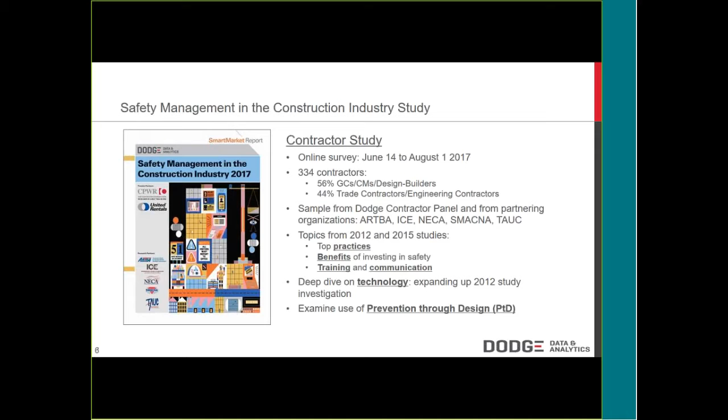In addition to that, we also looked at the concept of prevention through design, and when we get to that point in the presentation, I'll go through exactly what that means. But to understand prevention through design better, in addition to the contractor study that's been at the heart of all three SmartMarket Reports, we did an additional study for this one in particular, where we talked to architects just about prevention through design. This was done as an online survey using our own internal Dodge architectural panel, similar to our contractor panel that we use for the contractor study.

Because it was just the panel, we had a very short fielding period, just one week in June. We had 108 architects who responded. And I do want to emphasize again that what I'm going to touch on, while it's going to be a lot of material, is just the top level findings. So there's going to be a lot more data in the report itself, especially if you're looking for details on breakdowns on things like GC versus trade contractor responses, or responses by size of company.

So I do want to make sure everyone's aware that there are two places you can download this for free: analyticstore.construction.com that I mentioned before, and in addition to that, you can go to our main construction.com site, go to toolkits and hit reports, and you'll see it right there.

So what did we find when we talked to these contractors, and when we get to prevention through design, the architects? Well, the first area we focused on was practices. We wanted to find out what people were doing. In the past, we had looked at practices as well, and done a pretty large, comprehensive look at a bunch of different practices. This time, to save time to get to some of the other issues we wanted to cover in the study, we focused just on some of the top practices that had come up in the previous research, the things we saw people frequently doing.

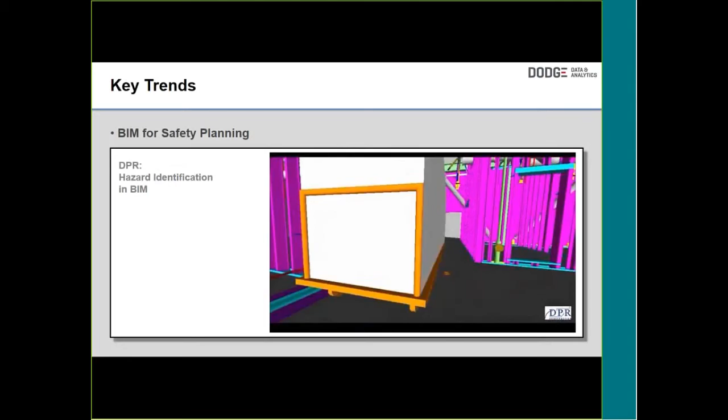On that last point, we've heard anecdotally from contractors that it's becoming more of a challenge to find skilled laborers on site who are adept at reading plans. The ability to have 3D images is becoming far more important on site for people understanding what's going on. I have an example from DPR Construction about how they used BIM to improve safety. It's a small example, but a compelling one.

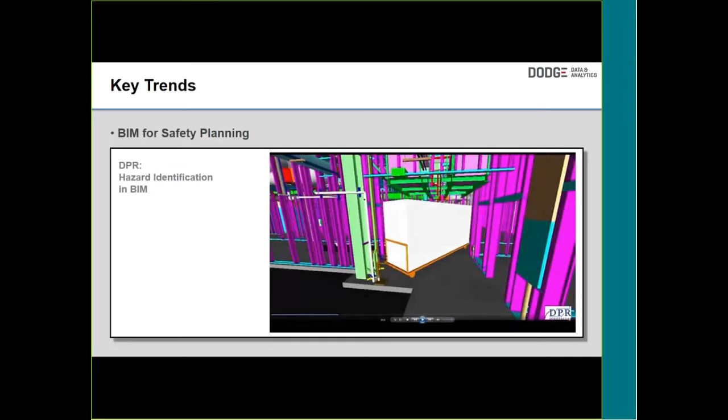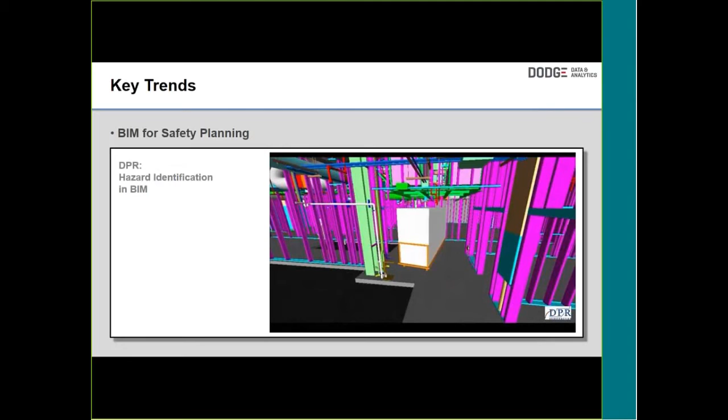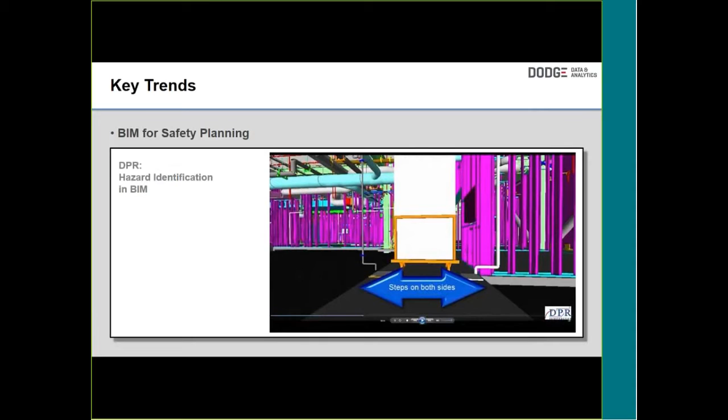They had to bring a big cart full of drywall sheets through a very tight corridor on their project. Instead of just getting it in there awkwardly trying to manage around every obstacle, they were able to map out every obstacle that might impact its course through in advance, and help set up the guys who have to take it through so they could do it much safer.

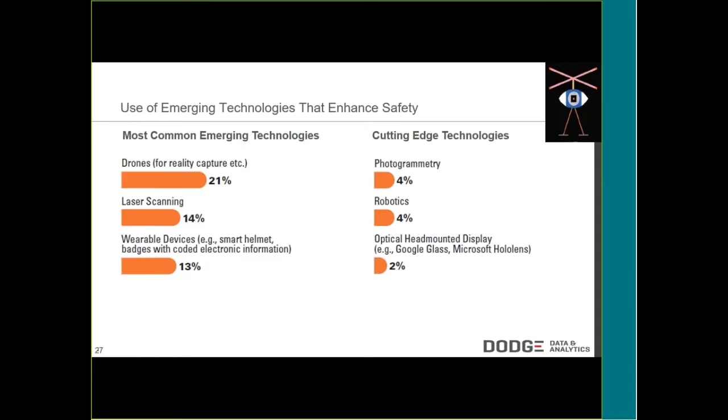When it comes to emerging technologies, we can see some activity. 21% are using drones on site right now, again not necessarily for safety, just in general. 14% are using laser scanning, and 13% are using wearable devices. There are slightly more cutting-edge technologies where we see a much lower level of use right now, but it's great to have this baseline for the future. This includes photogrammetry, robotics, and optical head-mounted displays. We'll be interested to see if those numbers go up over the years.

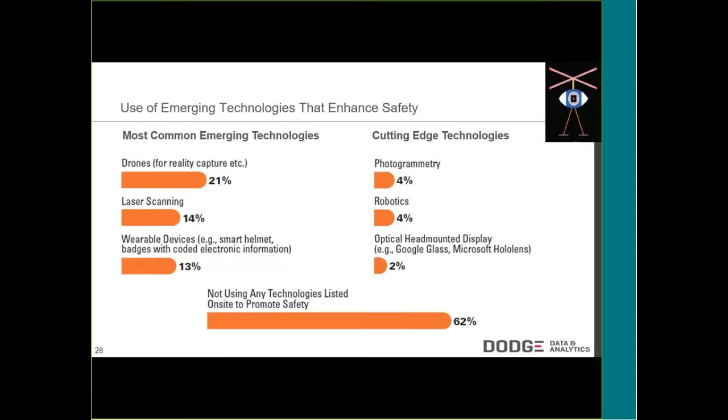But you can see that all of these really are emerging technologies because well over half of contractors are not using any of these technologies on site to promote safety. Then we asked, okay, you're using these devices—what is their impact on safety? Again, we had them rated on a 5-point scale from positive, 4 and 5 are positive, 3 is neutral, and 1 and 2 are negative.

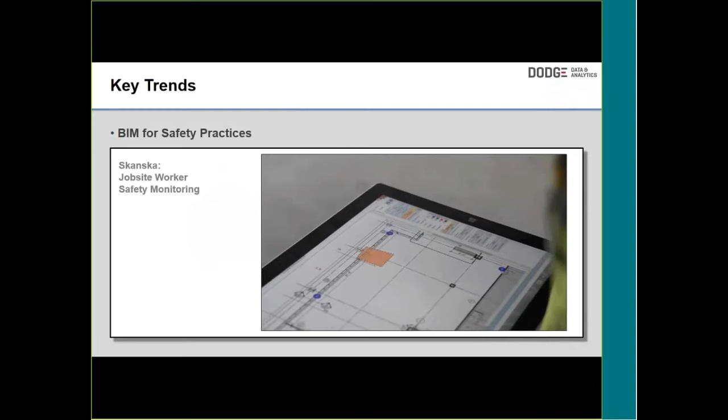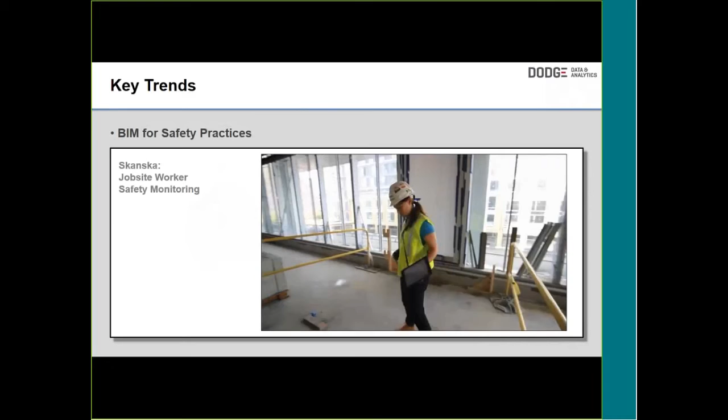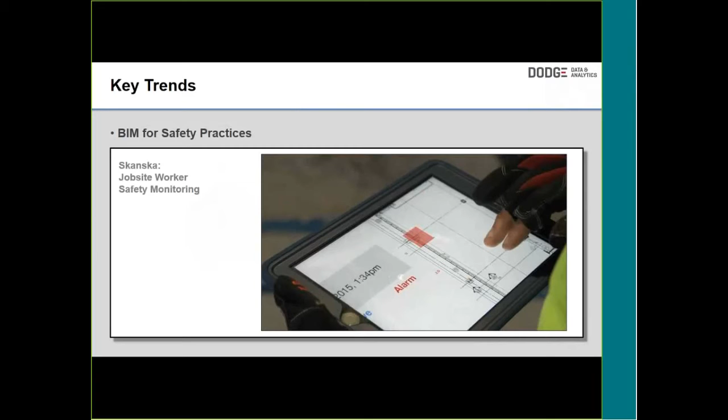And you can see there's some pretty amazing stuff that's being done. Skanska has been using wearable devices combined with software so that they can identify places on their projects where certain workers should be prohibited from, things that would be unsafe. If a worker happens to wander into that area, their wearable device, their vest, lights up to let them know that they are where they shouldn't be. In addition to notifying the worker, their supervisor also gets to see that someone had gone in there and set off an alarm. It gives them an opportunity to work with them and make the job site safer.

Now, we didn't ask a lot of questions in this section about virtual reality, but we did get some interesting feedback about virtual reality that's included in the Smart Market report in either case studies or thought leader interviews. One of them was Hensel Phelps' use. They had actually invested in a 360-degree camera just to capture existing conditions for QC purposes on their projects. Their safety manager saw what that camera was producing and realized it was a great opportunity, and he was able to convert the images that camera created into a virtual reality environment. They were able to flag things they knew were hazards on the site and have their workers walk through these sites virtually and identify the hazards. Really exciting way to take advantage of those technologies.

Clark Construction also shared with us their use of virtual reality. For them, they do these training sessions where they want workers to understand what it means before they're actually up there, what it feels like to work on a steel beam that's 10 stories up. So they put someone in a virtual reality environment, they put them on a 2x8 to simulate the beam, and they found that the emotional response that creates has helped workers to behave more safely when they actually get up there, more likely to tie off appropriately, because they have that visceral memory of going through that process.

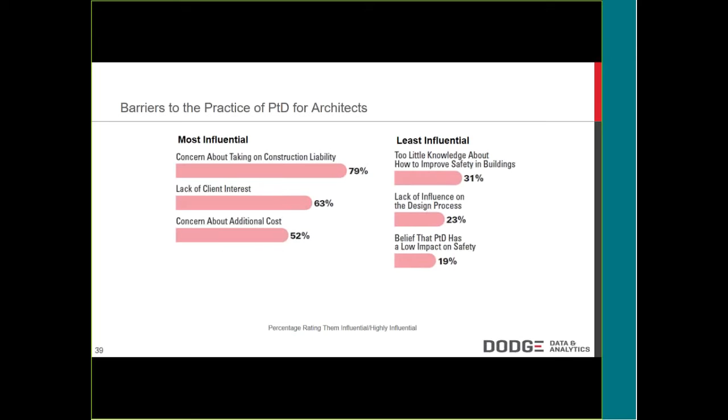Even more interesting is that last bar. The belief that PTD has a low impact on safety is only influential to 19%. So this does suggest that if you can get past some of the other barriers, it's not that the architects are not willing to accept the idea that they can influence it. It's these other barriers of liability and clients that are really standing in the way.

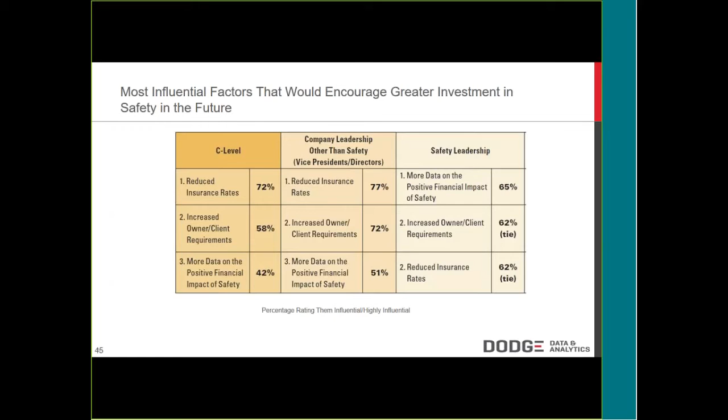Finally, the last category we'll be looking at today is training and communication. Again, some of these things we've looked at in multiple studies. We asked the general and trade contractors whether they offer or require safety and health training. I do want to go through this a little bit. To be clear, the percentages you're seeing on the bar are those contractors who said they offer or require training on at least 75% of projects.

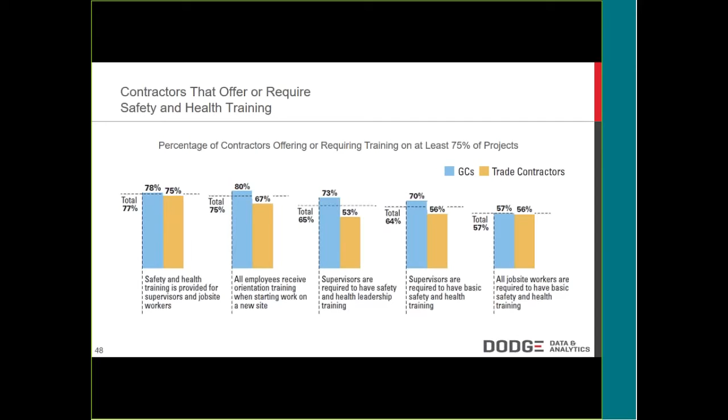However, general contractors are far more likely than trade contractors, on at least 75% of their projects, to give employees orientation training when they start work on a new site. GCs are more likely to require that supervisors have safety and health leadership training, or that supervisors have safety and health basic training. But requiring that job site workers have basic safety and health training is the least common of all the practices, and it's really no more common among GCs than trade contractors.

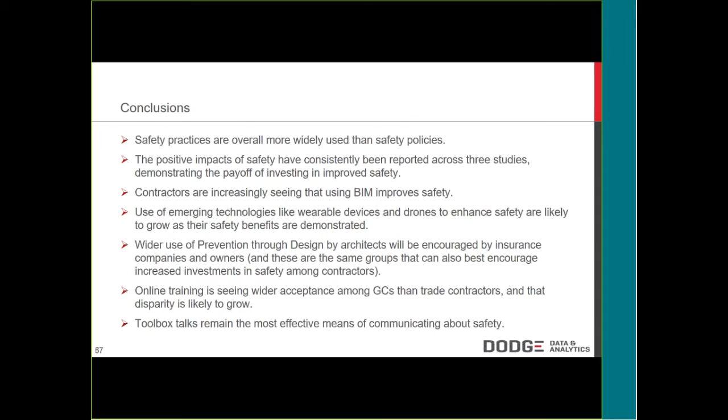We see that wider use of prevention through design by architects can be encouraged by insurance companies and owners, and those are actually also the same groups that can best encourage increased investment in safety among contractors. Online training is seeing wider acceptance currently among GCs than trade contractors, and that disparity does seem to be growing, and toolbox talks are still the most effective means of communicating about safety.

So those are the findings of our study. Thank you for going through these with me. I'll be happy to hand things back over to Jessica right now and take some questions.

Jessica, you may actually want to leave the presentation up, Donna, just in case we have to go back to it. Okay, yep. You're still seeing it, right? You're still seeing the question screen? Yeah, I just thought you were closing it out. Yeah, okay, no, I just wanted to be able to see the rest of the tools. Yeah, okay. So thank you for the presentation. We have questions that have been coming in as you went.

Going back to the first one, the question was, do you have data on how contractors quantify the impact on their budget? No, we don't actually have data on that. Since we do an online survey, we are limited in what we can ask, and it is all self-reported. That would be an interesting area of follow-up, though, if we were ever going to do a deeper dive on the benefits. It would be nice to know exactly where they're pulling from. I know we're doing some research right now in a different study looking at KPIs, and some of that might be able to capture ways that people are doing that, but that's in the field right now.